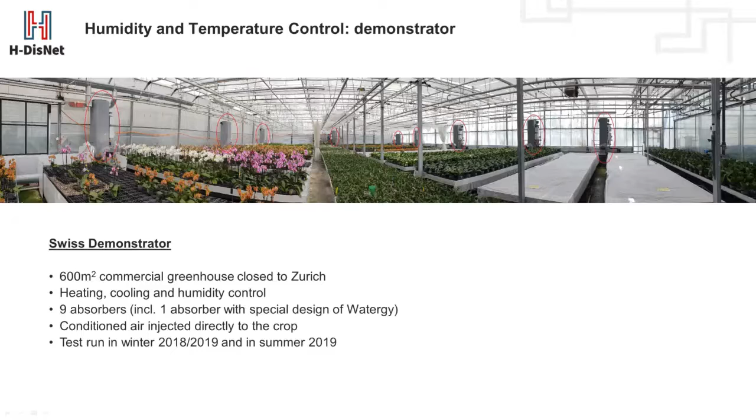Okay, here. So this is a picture of one absorber. It was the first absorber that we installed in the greenhouse, and now it's in our lab at the university. You see it's transparent, and the reason is so we can control what happens inside, if there is some dirt, if the distribution of salt solution is good, and so on.

On the right, you have a diagram of the system. Actually, it's the system that we have in the lab, but the construction of the absorber is the same. So in the lab, we take the ambient air, and then here in this box we have the possibility to cool or to heat and humidify the air in order to create the condition that we want to test.

The air then goes this way, from the top to the bottom. This is only a matter of the construction in the greenhouse, but the absorption process takes place in this colored part. That means the absorption takes place in this absorber where the air goes from the bottom to the top, and in yellow you can see the salt solution that goes from the top to the bottom. The salt solution is then collected here in a sump and pumped around the absorber in this way.

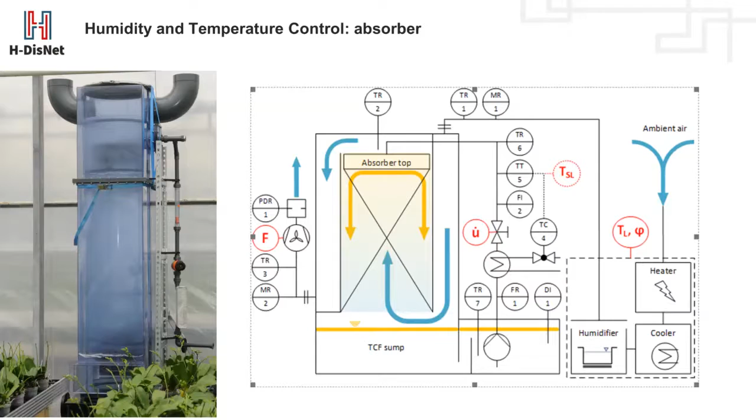So I take the example of absorption. During the absorption, heat is released because the humidity is absorbed, so we have a condensation process. And we control the temperature of the air through heating the salt solution. But we need less heat than without the absorption process, because we also use the latent heat that is released during the absorption to heat the air. And this is the trick to save energy with this technology.

If I go to the next slide, I told you before that we developed a new system to inject the air to the crops in this greenhouse. You can see here a small schema. So we inject the air directly to the crop. Here in this picture it is below the table. You see we have this pipe. This pipe has small holes, and through these holes we inject the air.

That means we control the temperature not of the entire greenhouse, but only above the crops. In this case, we have two advantages. The first is we don't need to temper the entire air of the greenhouse, whose volume is huge, but we control just the temperature here. That means we need less energy. What is interesting for the crops, for the plants, is the temperature around the plant.

And the second advantage, you see this is a huge greenhouse. In our demonstrator, it's not the case. We have only flowers, the same kind of flower, but actually you can have one type of plant here, a type here, and another type here. So different types of plants, crops, which maybe require different temperature and humidity. And with this system, we control the temperature and humidity of each single table. That means we can also create different climates inside the greenhouse.

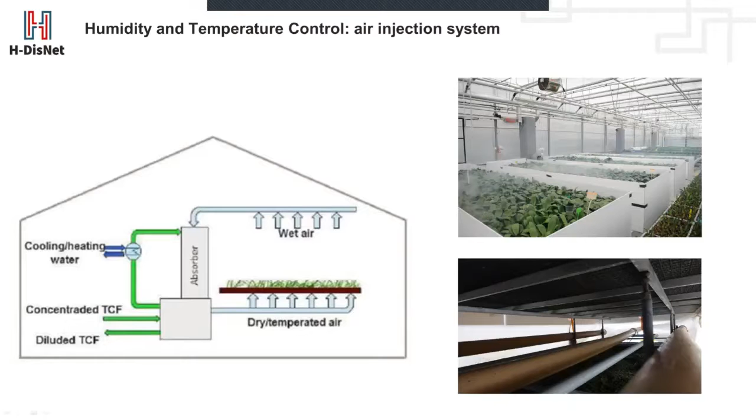Here I want to show you the results that we did. So we did some tests during the winter and during the summer. Here I show you the test that we had last December 2018. So on the left, we have the relative humidity, and on the right, the temperature.

What is interesting, if we have a look at the diagram with the humidity, you see this line is the humidity of the greenhouse. This other line in pink is the humidity at the inlet of our absorber. So you can see that it's already quite different. And the horizontal lines are the humidity at the outlet of each absorber. What is very interesting, you can see that we can maintain the humidity quite constant. So the variation is very small.

And also with this system of injecting the air below the table and controlling the humidity only above the table, you see also the huge difference between the humidity that you control if you have a common system in a greenhouse, so you control the air in the greenhouse, and the humidity that we have around the table. So the difference is huge. That means we have to control this one and not the one of the greenhouse.

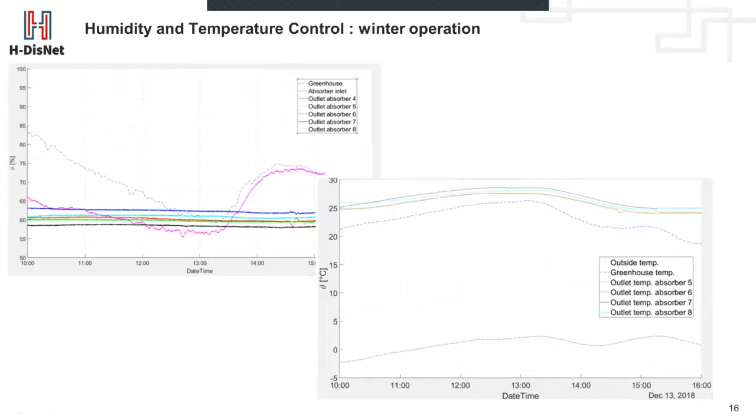But what is interesting is to see the energy that we required. Left is the energy that we require in the greenhouse with the traditional system, and on the right with our system. The traditional system in the greenhouse consists of two different systems with hot water, one below the table and another one above the table. Now we have a look at the light blue and yellow line. Here is the scale. So they are the energy required of the system below the table in blue and above the table in yellow.

The experiment was done between 10 o'clock and 4 o'clock. And we see on this day, where we didn't have the absorber in operation, we need more or less 300 kilowatt hours to maintain a constant temperature. The same we did on the right, where we had the absorber in operation. In any case, we maintained the heating system also in operation to guarantee the 25 degrees.

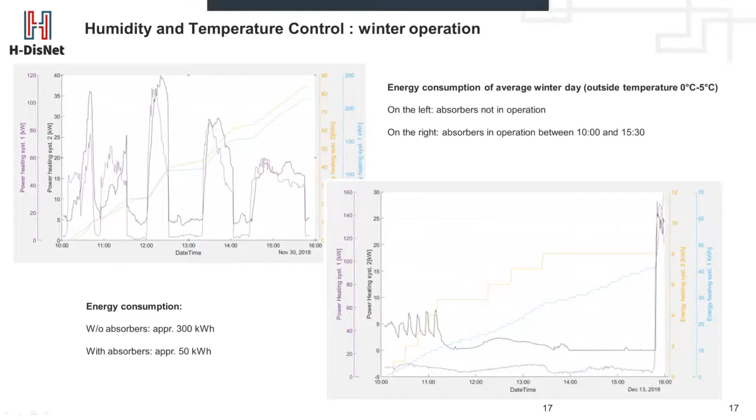But what's very interesting, with the absorber in operation, we need only 50 kilowatt hours. It was not the same day because it was not possible to do it on the same day, but the outside temperature in both cases was around 0 and 5 degrees. So you see that we save almost 80% of the energy to heat the greenhouse.

We did also some tests during the summer. Unfortunately, here it's not possible to compare the energy required with our system and with a traditional system because there is not a traditional system at the moment. So they don't have the possibility to cool during the summer. What we see here on the left, between 12 o'clock and 6 o'clock, our absorber was in operation. So in blue is the temperature of the greenhouse, and here in red is the temperature at the absorber outlet. So we were able to decrease the temperature more than 10 degrees.

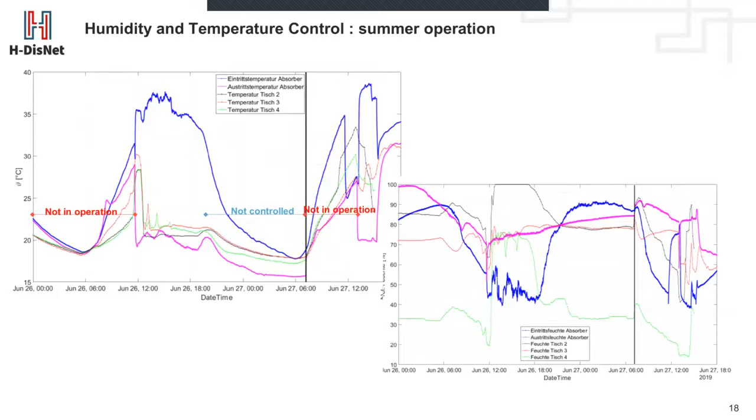On the right, okay, this diagram is not so easy to read, but there is the humidity. So this is the humidity at the inlet of the absorber, and in pink is the humidity at the outlet of the absorber. Sorry, it's the relative humidity, not absolute humidity. And so we cannot see it, but it was an absorption process. So we remove also in summer a lot of humidity from the greenhouses. This is what happened in summer.

You have also here a picture of our table. So number one is the air at the outlet of the absorber. So we are here. You can read the temperature. We have more or less 20 degrees, and the humidity. This is the humid air diagram. So before reaching the crops, the air was heated up from the heat of the greenhouse. But then on the table, there was some water. So we have an evaporative cooling effect.

So from 1 to 2, the air is heating up. Then we have a cooling down. This effect is the evaporative cooling that is possible only if the air is dried. We did this in our absorber. Then we have from 3 to 4 the transpiration of the plant. And from 4 to 5 it was more or less 2 meters above the plant.

So we have also another heating effect. But what we can see is that 5 to 1 is what happened in our absorber. So this 5 to 1 is the effect of our absorber. Then the other depends on the configuration of the greenhouse, of the table, the kind of crop that we have. So the potential of our absorber is quite huge.

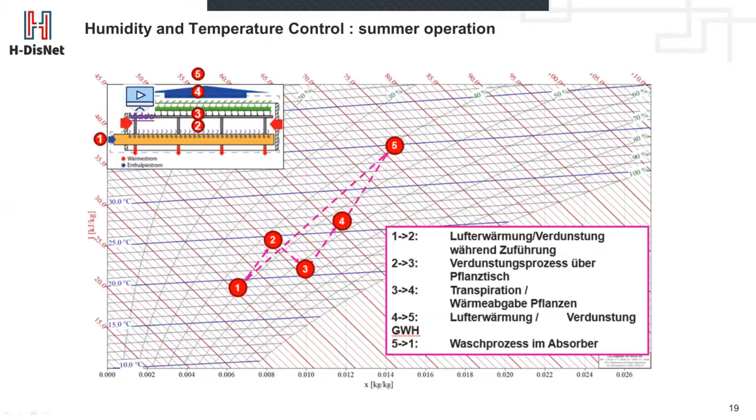We see that we go from more or less 40 degrees to 20 degrees. And also we reduce the humidity from 0.014 kilogram water per kilogram air to 0.007. So this is a short presentation about what we did in a greenhouse, and I can show you a short video so you can see what we really installed there. So Marco, you can show the video if we have time.

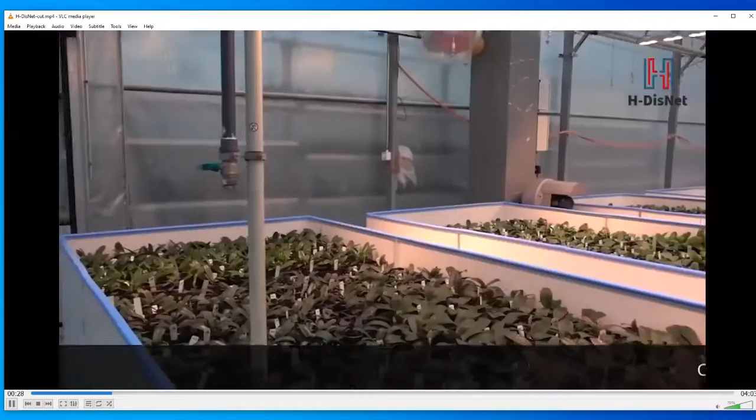So I repeat, the demonstrator was installed in this greenhouse. You see it's a huge greenhouse, and of this greenhouse we have the part here that is a room with 600 square meters. So we installed our demonstrator only in one part of these greenhouses. Here is this room. So you see the tables. The tables are also particular. We have this special white wall to avoid that cool air falls down before reaching the plant.

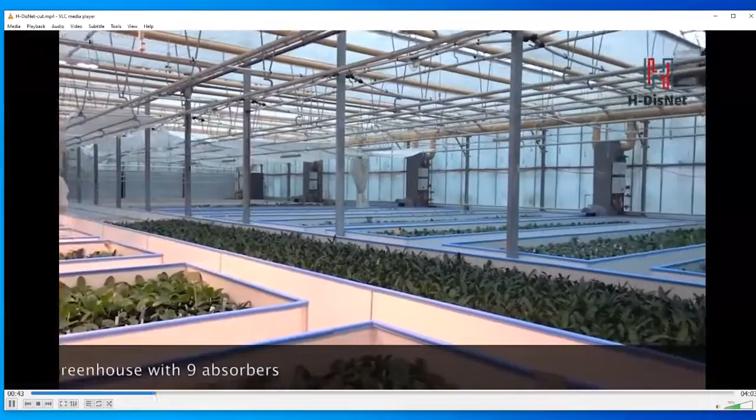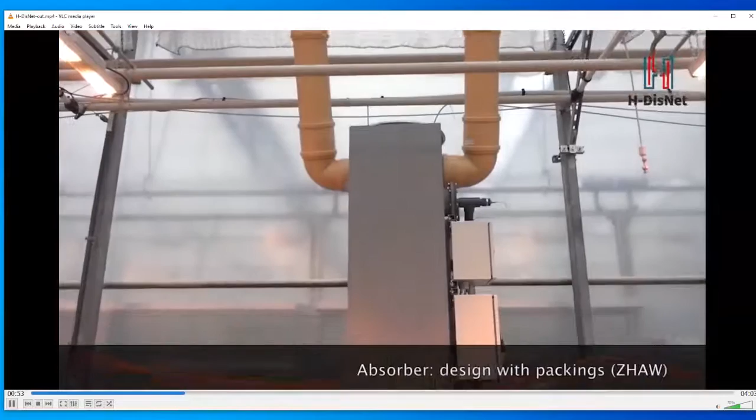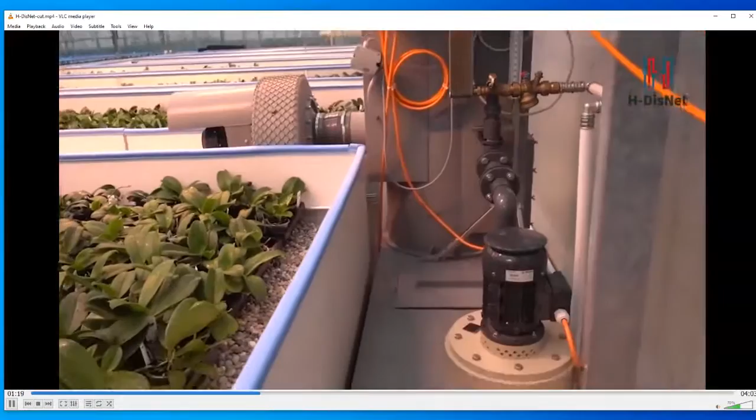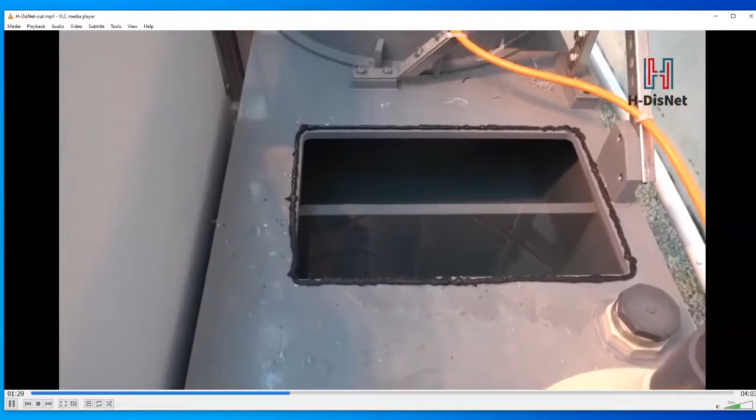This is the absorber. So we take the air from these orange ducts. So this is the absorber. The fan is integrated into the construction of the absorber. This is the part, it's difficult to see, but this is the pipe of salt solution. So this orange is the valve for the salt solution. And here is the sump where the pump for the salt solution is integrated. The solution actually looks like water. So we have two different sectors in the sump to divide the concentrated salt solution from the diluted salt solution.

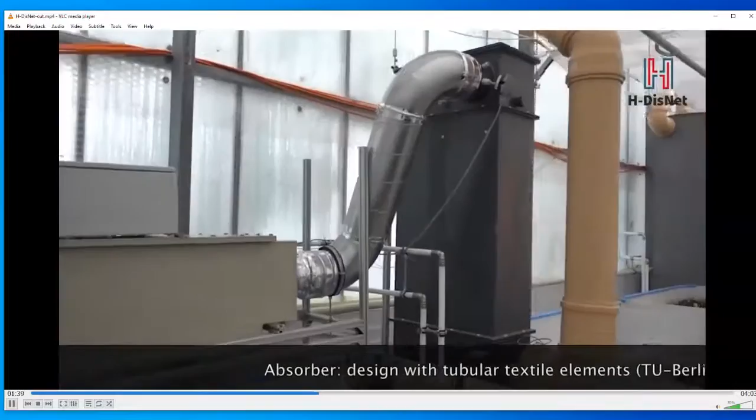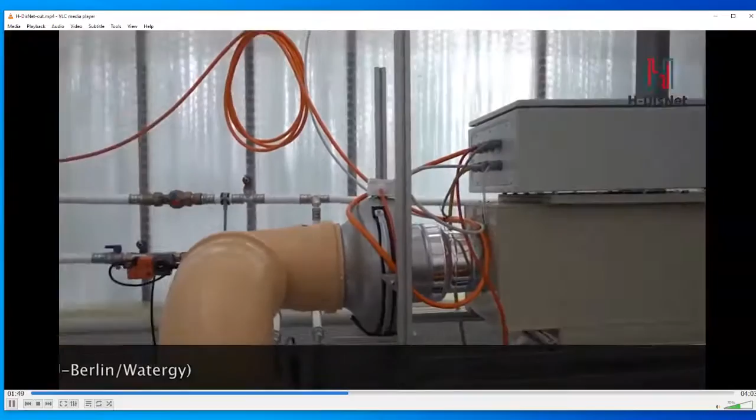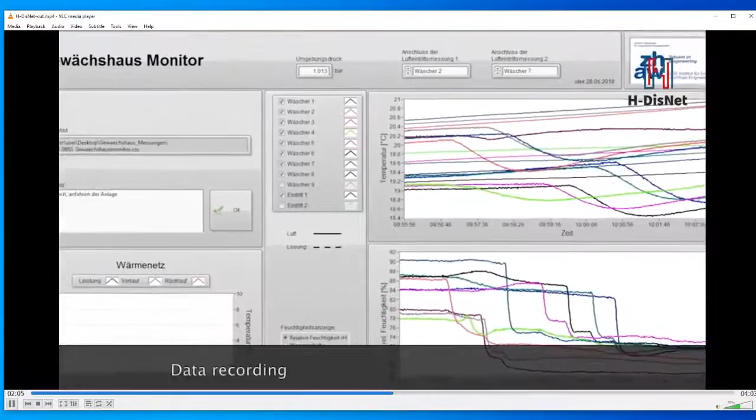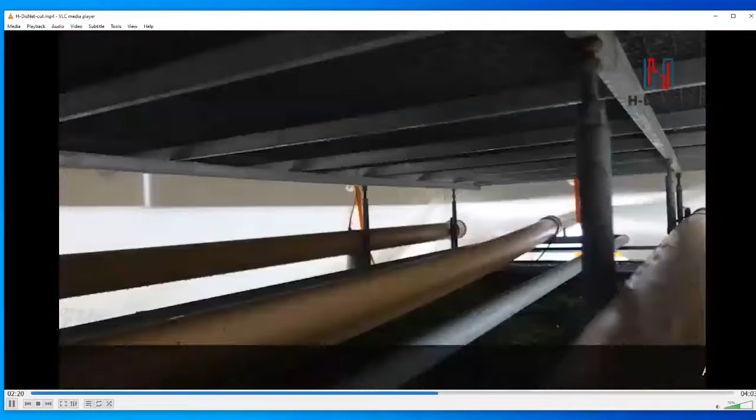And this is the special absorber that we also installed in the greenhouse. It's a design of Watergy. It's a different design, and we want to compare the two different designs. So of course we have a system, a National Instruments system, to measure all the temperature and the humidity. You see, we measure the humidity directly above the table in order to control the temperature required by the plant. And these are the pipes below the table with these holes. So the air is injected directly on this grid.

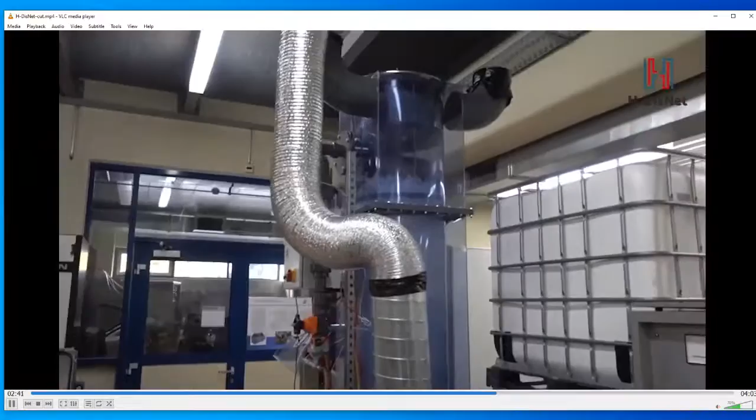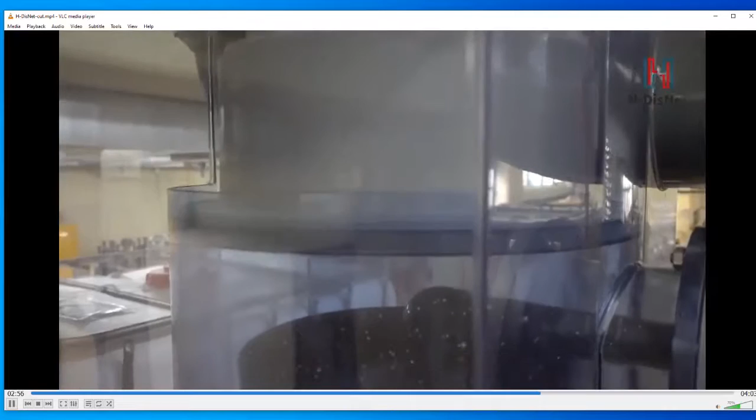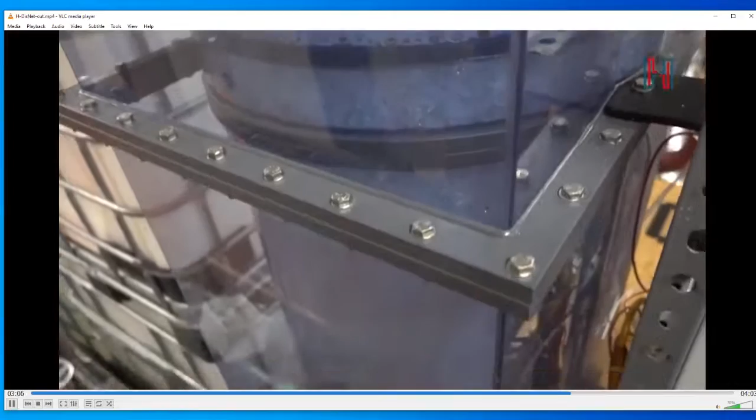And this is the absorber in our lab at the university. So we have this transparent absorber. We can monitor everything. And this wood box is to control the air and humidity of the air at the inlet of the absorber. This black is the distribution of the salt solution inside the absorber. We have this fill package in order to distribute the salt solution really well and to increase the contact surface between the salt solution and the air.

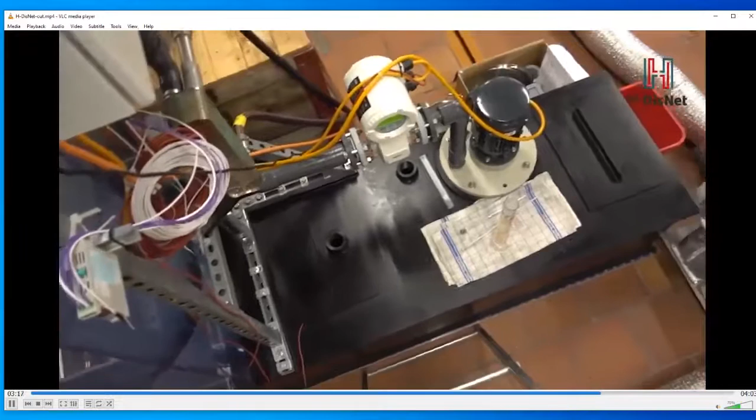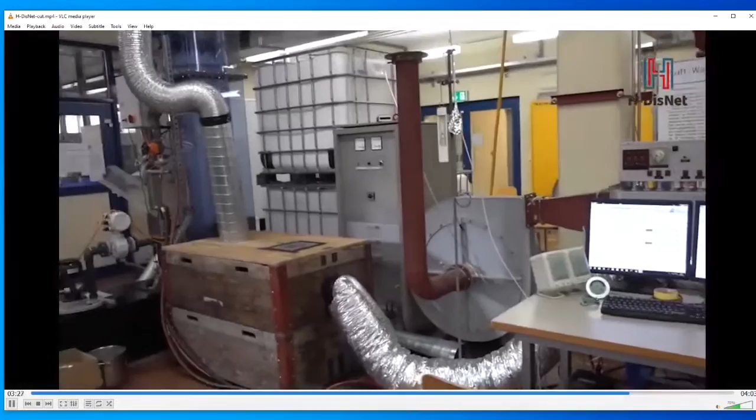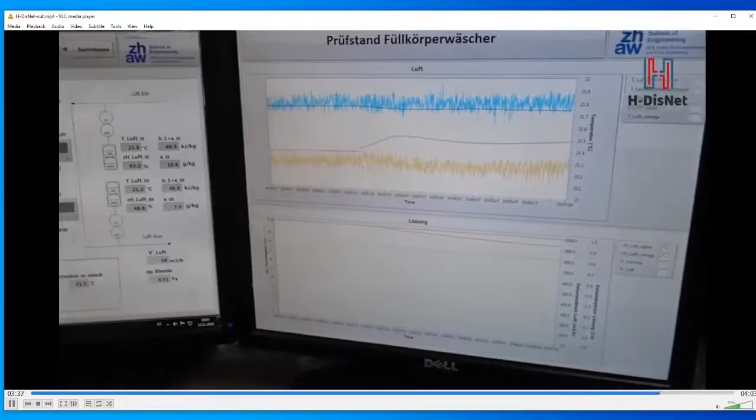And like in the greenhouse, also in the lab, we monitor all the values of temperature, humidity of the air, flow rate of the air, and then flow rate of the salt solution, temperature of the salt solution, on the computer. And also we can calculate directly the energy that goes from the salt solution to the air. Okay, this is the video.

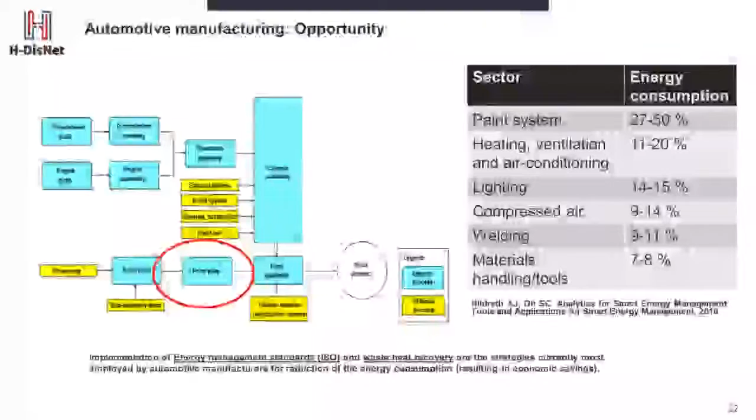So the opportunity that we've been exploring is really around an industrial opportunity for installing H-DisNet technology. We've been working with data from the local automotive manufacturing plant here in Newcastle, which is a very large scale manufacturer of on-road vehicles. And they've kindly provided us with technical data in terms of the way energy is utilized across their site. And in those discussions, we have been able to articulate a good opportunity for the installation of the technology.

So in automotive manufacturing, you can see from this slide here, there are a number of different elements to the manufacturing process. And when you break those down in terms of the way that the energy is utilized, the majority of energy utilized in the automotive manufacturing process is from the painting system itself. As you can see from the breakdown on the table there, that can be between 27 and 50% of the overall utilization of energy on such a site. And that also fits within the context of things like heating, ventilation, and air conditioning, as well as compressed air systems.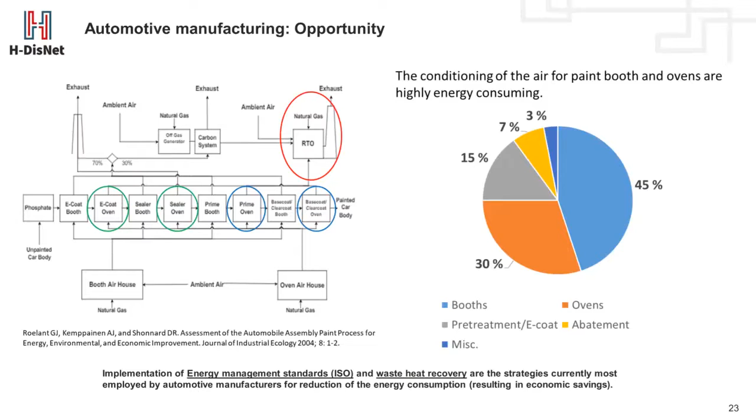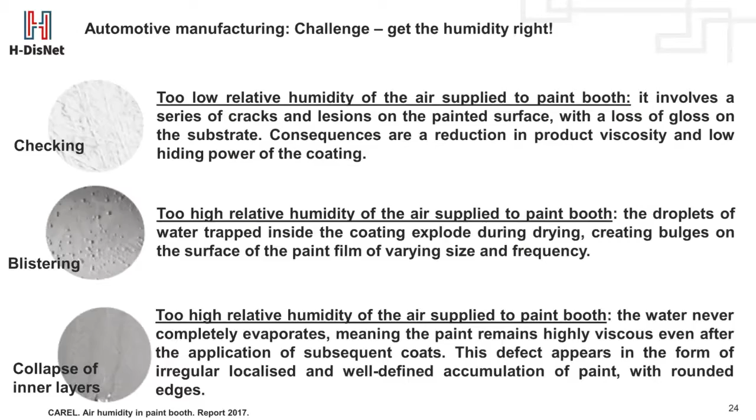So at the particular site we were interested in, we found that the standard air handling units are unable to deliver the narrow range of temperature and humidity that you might want. So they need to do lots of air conditioning and heating in order to maintain 23 degrees centigrade and a relative humidity of 70%. And you can see the tolerances have got to be within 1% and 1 degree.

So the challenge is that across different times of the day, particularly where we are, it's obviously lower than 23 degrees most of the time. So we need to find ways of handling that. And this is exacerbated by the fact that these processes are working almost 24 hours a day, so you've got nighttime temperatures and nighttime humidities also to consider.

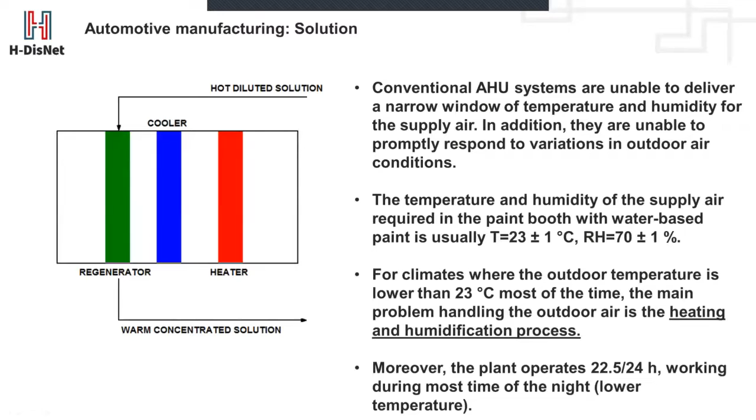So with the H-DisNet installation, the idea is that we take all of the temperatures we see across the day in our analysis, and we upgrade those in order to hit the optimal condition for the paint booth. We would use the liquid desiccant technology to achieve that and provide warmer and more humid air. We would use heat from the heat recovery process from other parts of the paint shop to power that system.

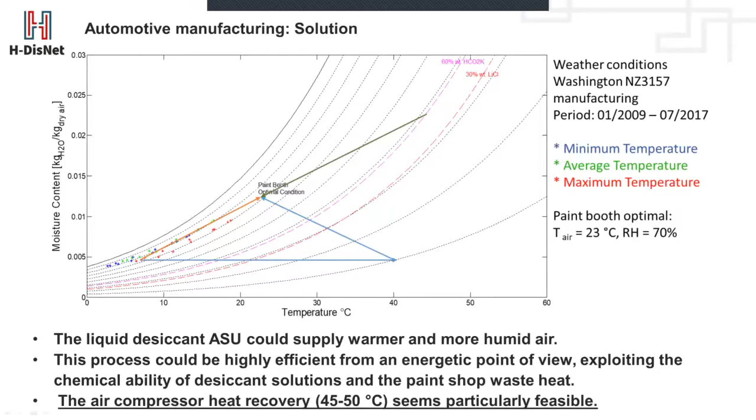In summary, we found that across different times of the day we had different heating and cooling demands, but overall the system is technically viable. To achieve this 23 degrees and 70% humidity, we costed up the system and worked out how much this kind of retrofit solution would cost. We determined the return on investment for the technology, and found it's slightly under 3 years when you work it all out in the detail you need for these kinds of analysis. These savings are realized through using lower amounts of gas and electricity on site.